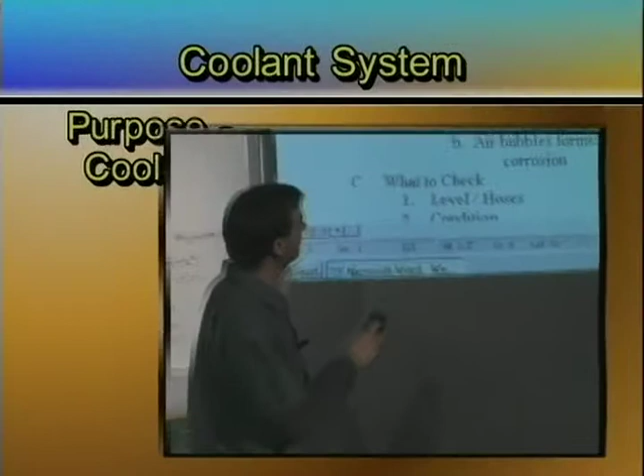Purpose of the cooling system: there's two things that the cooling system really cools. The first thing is the cylinder walls and the head. That's the typical place that most people view the cooling system as its purpose, what it's supposed to do.

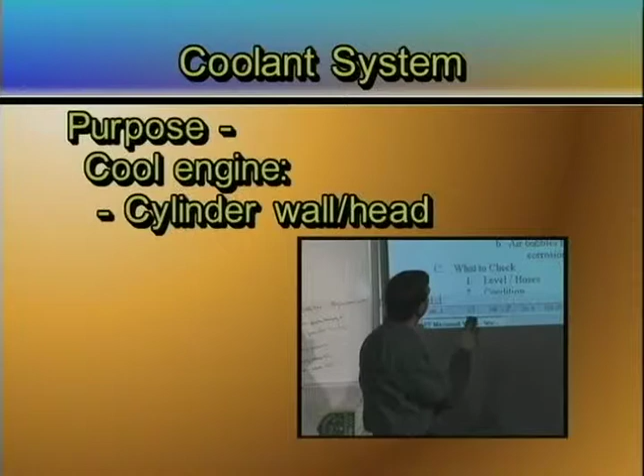The other thing that most people don't look at is the fact that it cools the oil. And that could either be from the oil splashing up on the cylinder walls and being absorbed through the cylinder walls into the cooling system, or if you have an oil cooler that goes up in front of the radiator, it also helps cool it that way.

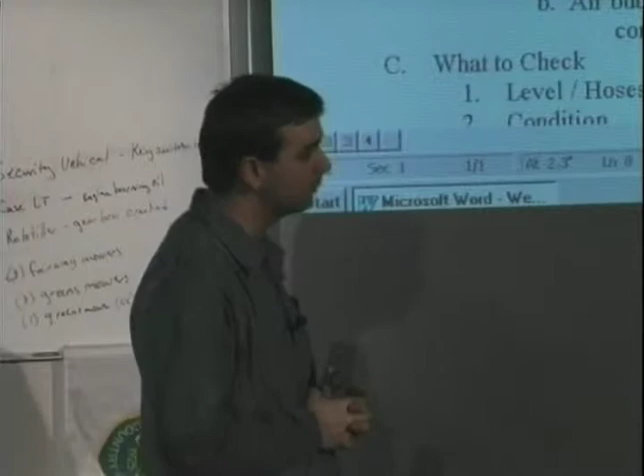So there's two things that this cooling system is actually trying to keep at some sort of uniform temperature. If that cylinder or that engine doesn't maintain a uniform temperature, then it's going to cause distortion and it's going to cause a failure of some sort.

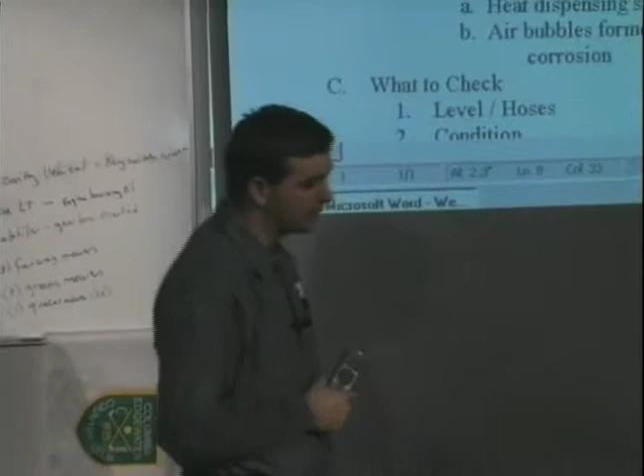We're going to talk about two different types of cooling systems. The two different systems will be air-cooled versus liquid-cooled. Primarily today I want to focus on liquid-cooled, but air-cooled is just as important. So when we get to the end, we're going to come back to some air-cooled stuff and what to look for.

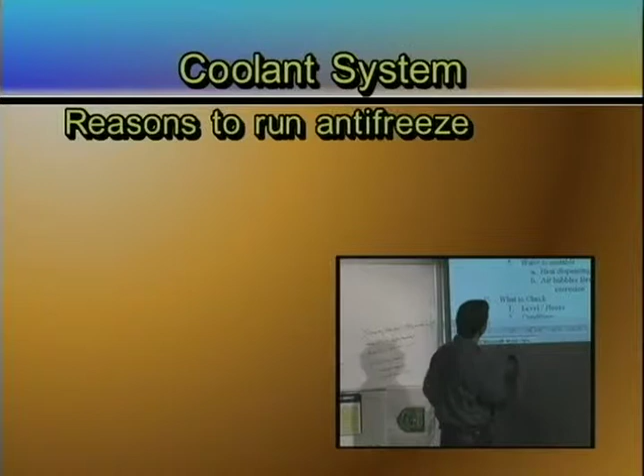Reasons for running antifreeze. There's a couple of reasons. Most people look at it as lowering the freezing point. You put water in your radiator and it gets below freezing, it freezes, expands, cracks the block, cracks the radiator, does some pretty severe damage. So the number one purpose most people look at is to lower that freezing point to prevent damage.

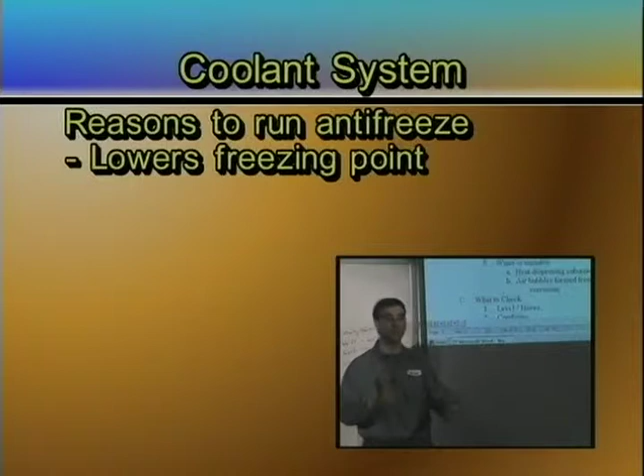There are other things that it's used for. The other one is to raise the boiling point. If you run straight water in your radiator system, the boiling point actually is lower, and so your engine will actually boil at a lower temperature. In the hot of the summer, you can actually cause damage from overheating. So we're actually going to raise that boiling point and help be more efficient.

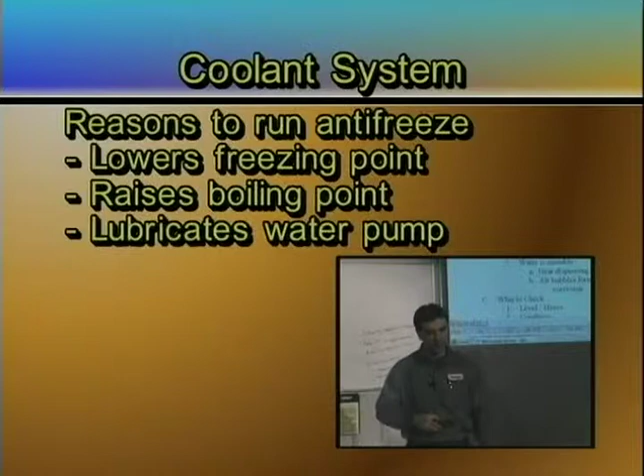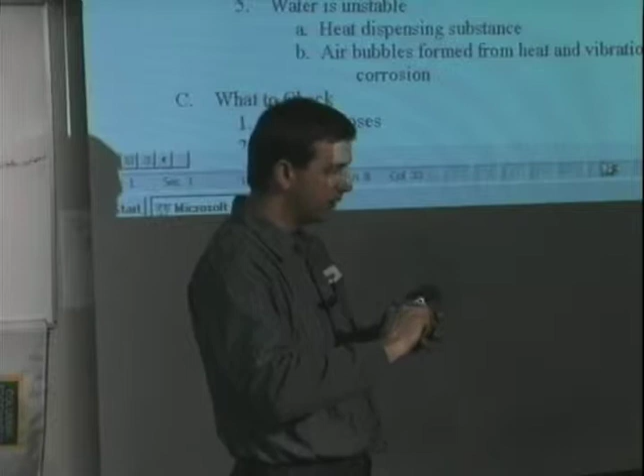The third thing is the fact that it lubricates the water pump. The water pump actually operates within the antifreeze, and the bearing that's on the inside runs in it. If you put water in a bearing, what is it going to do? It's going to rust it, and it's going to cause damage. So if I don't lubricate that bearing and that bushing, it's going to cause this thing to seize up.

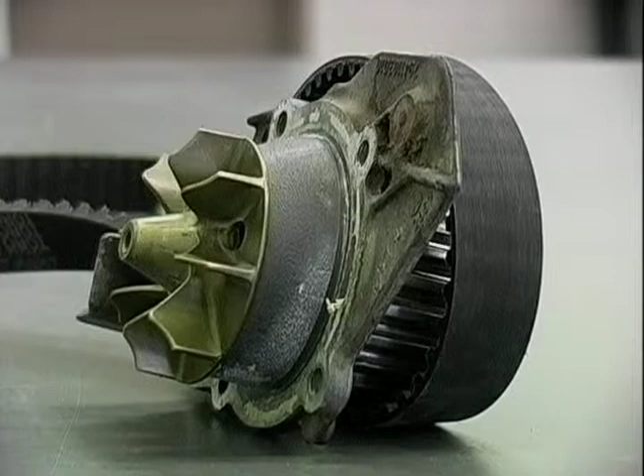This water pump came out of the 455D that was in the other room over there. We changed the timing belt. It's real easy to get to this water pump when you change the timing belt, because it's the next step in the process. To change the water pump, you take everything else off, and then this comes out. So we went ahead and changed it, and we only changed it because we were there.

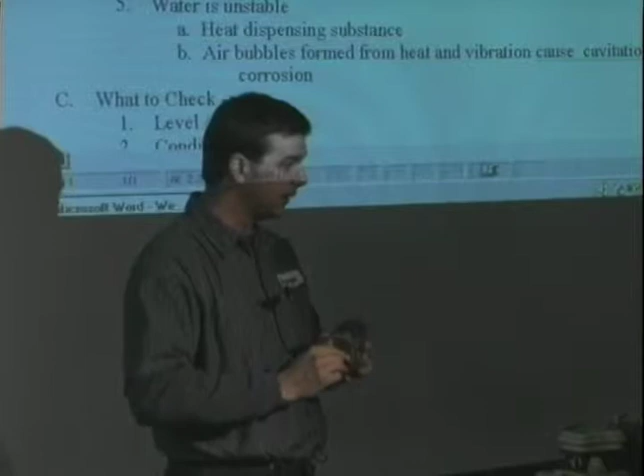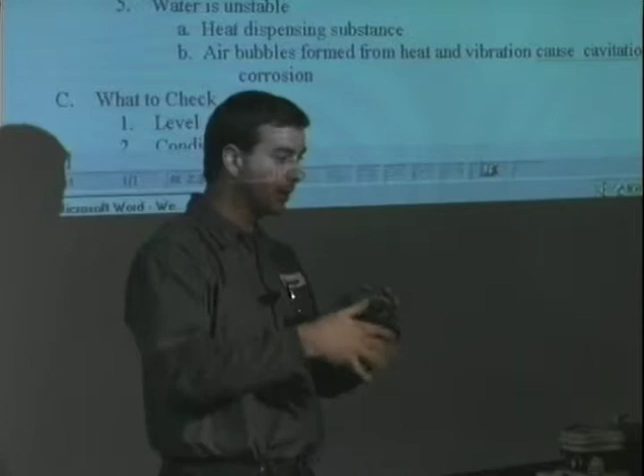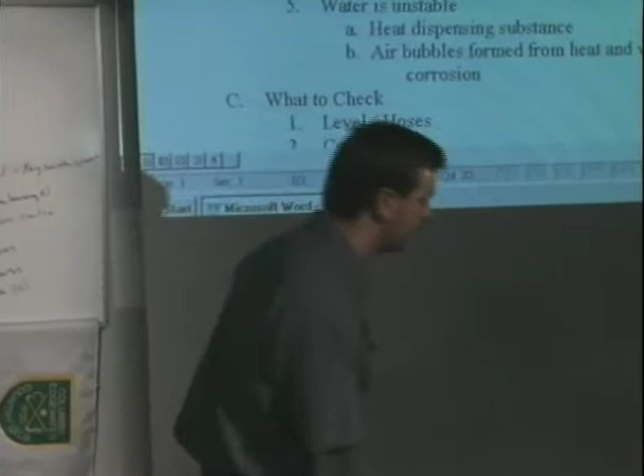I'm going to pass it around. Feel this thing and try to turn it. It's pretty sticky. So since we had to put all the time and labor to get to it, we went ahead and changed it. This little water pump cost $256. Not a cheap decision, but you look at how much time it takes to get to it. If we hadn't changed it, it probably would have failed relatively soon.

The cooling system, when we got into it, was pretty old. The antifreeze had been depleted, so we had seen a lot of calcium build up, and the additives were obviously depleted in it, which is probably why this water pump actually went bad.

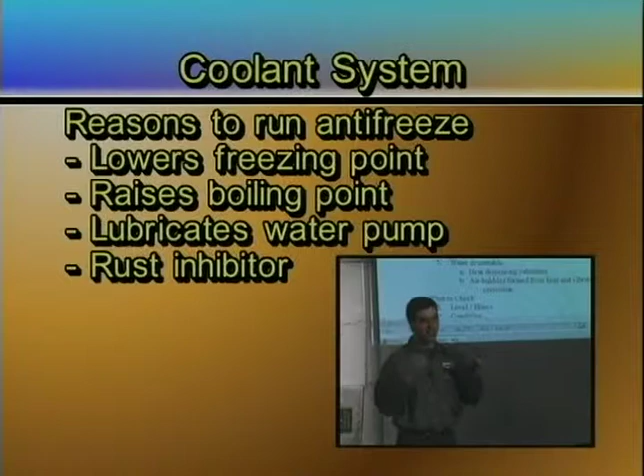The fourth reason, it's a rust inhibitor. If you put straight water into an engine, it's pure metal. It's just raw metal in there. There's nothing to protect it, and it will rust really fast. Here's some liners that came out of an engine, and you can see the scale and the debris, the rust and stuff that's on here.

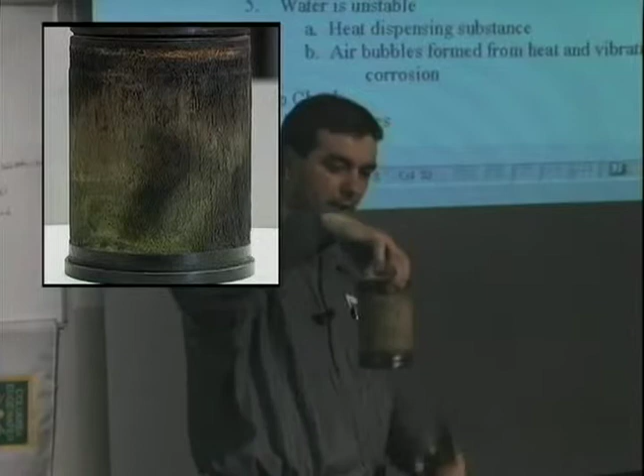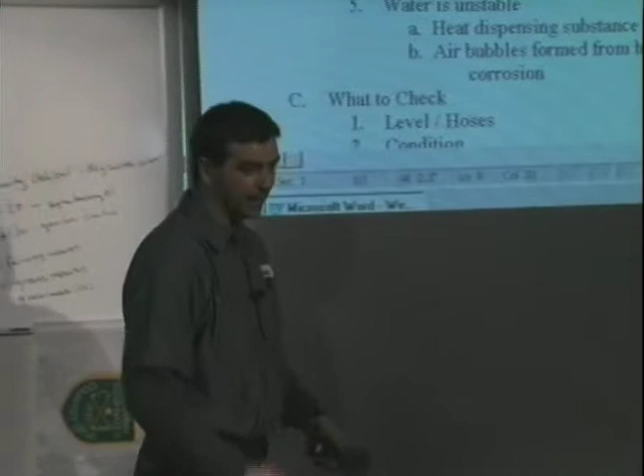If you just ran straight water, this would be just caked with rust. It would start attacking the metal and start eating and rusting through it. And it would take out that water pump very quickly. So it actually acts as a rust inhibitor and protects the whole inner side of that cooling system that is all exposed.

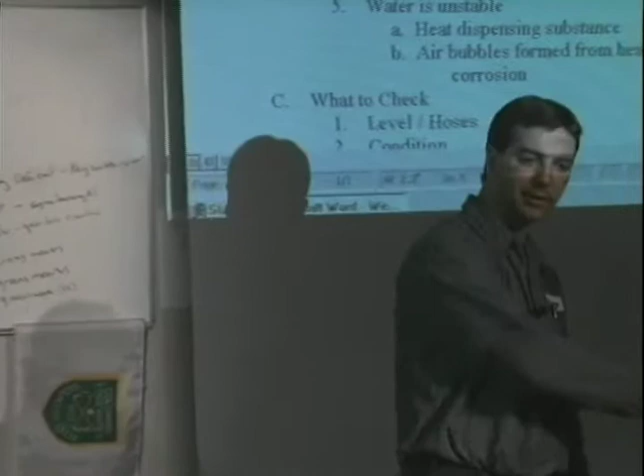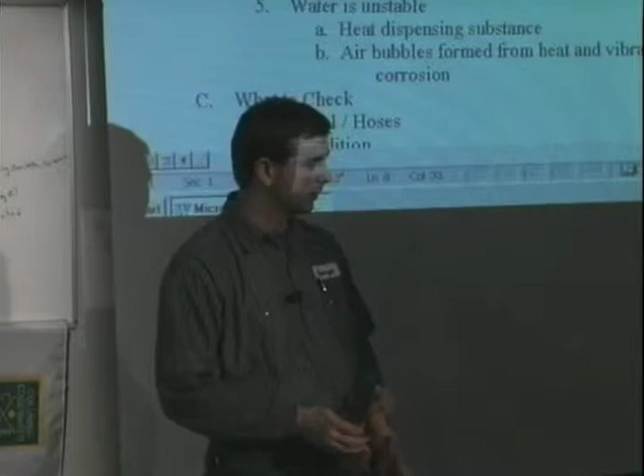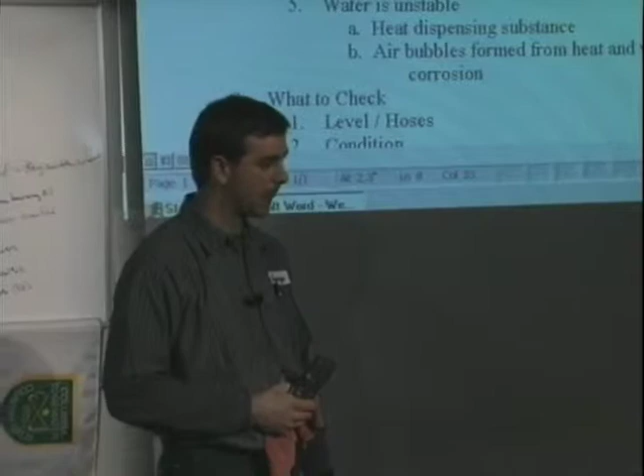Why don't they go ahead and just pour paint through the cooling system and coat all that metal so that it doesn't need to be protected from rust in the water? Why would it burn up? Why would the engine get too hot if I was to coat those passageways with paint of some sort? What's that? Give me a reason. Just throw something out. Why do you think it would?

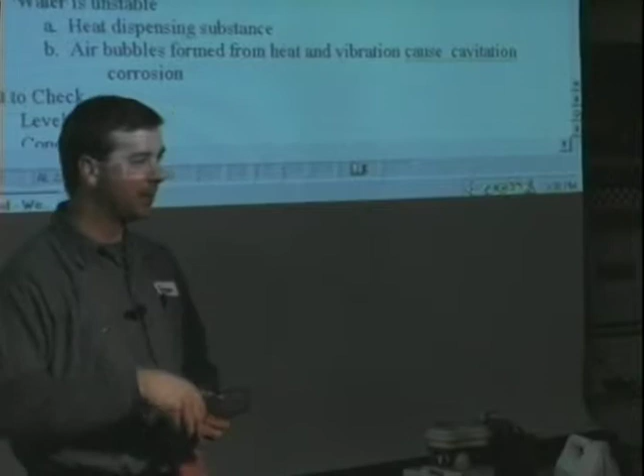Why don't we put paint in there? We protect the outside with paint. Why can't we put paint on the inside? Different conditions on the inside and everything. Different conditions? What is paint?

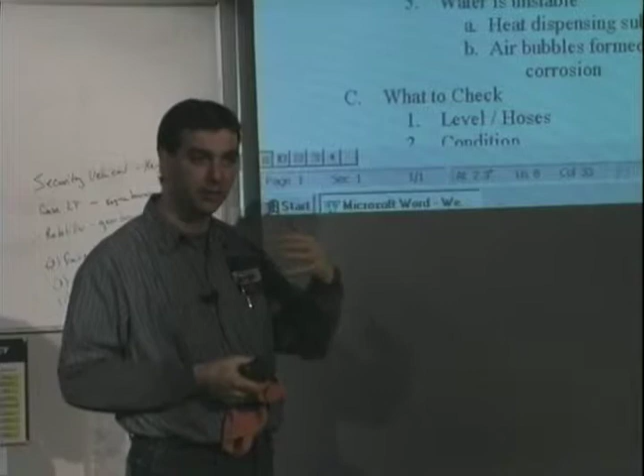Paint acts as an insulator, so if we coated it with paint, it would be more material that the heat would try to transfer through, and paint doesn't transfer heat very well. So we would actually be defeating the purpose. We're trying to get the heat away. So we leave it bare and put some sort of protection in the antifreeze.